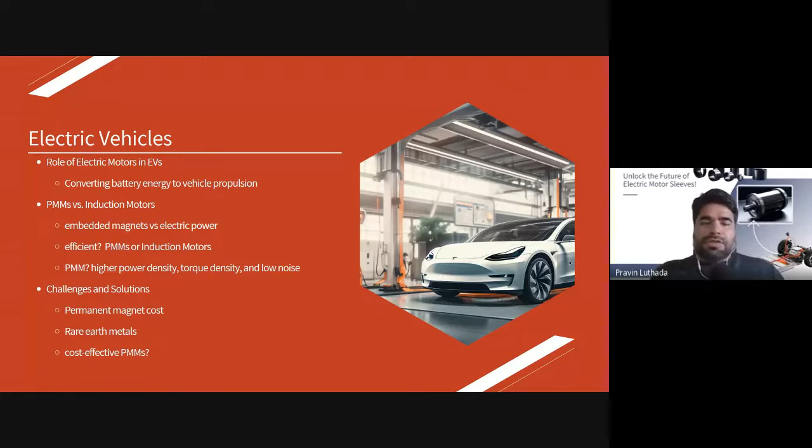expensive relative to the induction motors. So there's the economic plus and minus to be taken into account, and you start to see why composite sleeves start to make sense. So the electric motor sleeves, the main purpose why they were brought into the picture is to hold the magnets in place while the motor is in operation.

These motors are running at much higher RPMs, and these magnets, though lesser in weight, the momentum created by the high speed of rotation is so significant that it can easily break through metal sleeves at higher RPM. Thus, you would want to have sleeves that are able to hold the magnet in position at the highest rated rotation speed. So efficient operation means to have them not shifting.

One of the key concerns to start these was that once you start to make them thinner, the safety concerns start to rise up. The rest of the sleeve considerations really come from that: if the magnet is not kept in place,

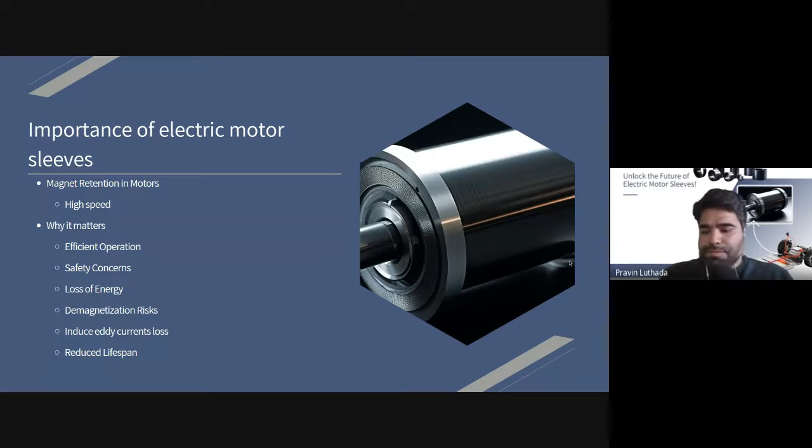So going into the materials, to begin with, when the motors were initially conceived, I believe it was metals where they started, and the operations were not at such higher RPM. So the main sleeves, still predominantly used in many of the industries, are stainless steel. For slightly premium applications, Inconels and titanium sleeves, despite their difficulty of manufacturing, they are metal. Most mechanical engineers understand metal, so they tend to go for difficult to manufacture yet slightly less dense

metal with higher strength. The key advantage, I believe, based on literature, to choose the metal is to match the coefficient of thermal expansion. So if there is going to be heat generated during the high speed rotation, the magnet and the sleeve would expand at the same expansion ratio, thus not disintegrating and holding it together well.

However, what ends up happening because of the higher density of the metal, at higher rotation the self-induced stress of just the sleeve alone is so high that it starts to expand, thus moving the magnet away from the right placement in the magnetic field, creating losses and more heat, and cycling it to either very inefficient motor operation or failure possibilities. And I think one of the other factors is the conductivity. So in case there is some electric current that ends up touching, it could cause the sudden failure of the system, of the motor.

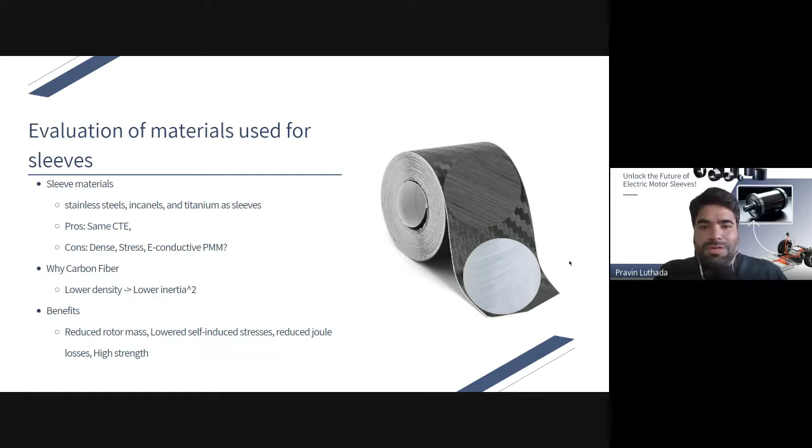Yeah, I believe that kind of covers why the whole industry would like to move to the carbon fiber side of sleeves. And as people knowing the composites industry, we know the cost and the manufacturing difficulty associated is the one that is preventing the move from happening. So by this point, we understood why we need more motors, why we need them to have good sleeves, and what the best material for the sleeve is.

Now, as we move towards designing the sleeves, we would want to consider what stresses and operational parameters while selecting the material thicknesses given the application scenario. So, based on the literature, what I have found, first and foremost is the hoop stress at higher RPM that creeps in and pushes out any contender that does not have very high strength along the radial or the hoop direction.

The magnetic assembly, you would want to have it assembled in a way that it is press fitted or in a way it's not allowing it to easily lift off. It's better to say a kind of chambered design that does not allow it. It's one of the most common approaches, and as you start to assemble the motors, you would want to have pre-stress applied.

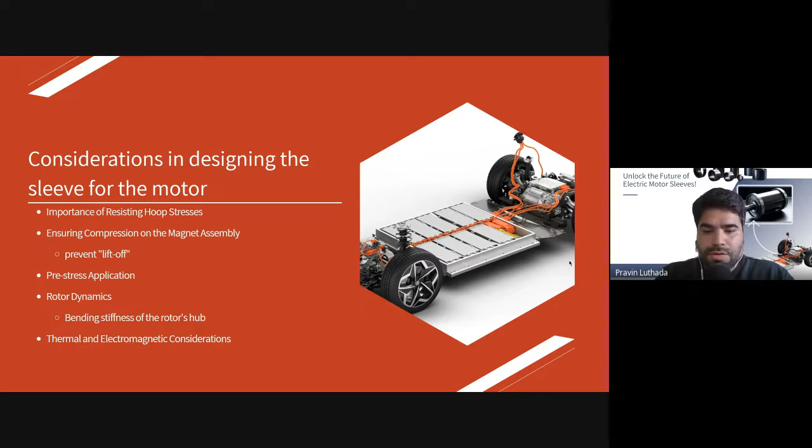Going to the next stage, and going beyond the material strength and modulus properties, corrosion resistance and the ability to be in multiple environments is one of the key factors for longer operation. So over the years, you don't need to look under the motor, because even if there is some moisture creeped in, there is no way there's going to be any rust. Composites are very good for vibrations as well, and as you're running at such higher rotation speeds, you're trying to make sure that you're staying away from the natural frequencies.

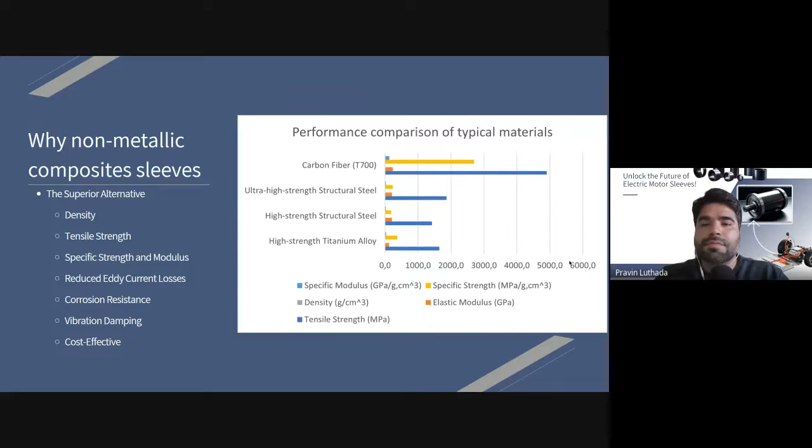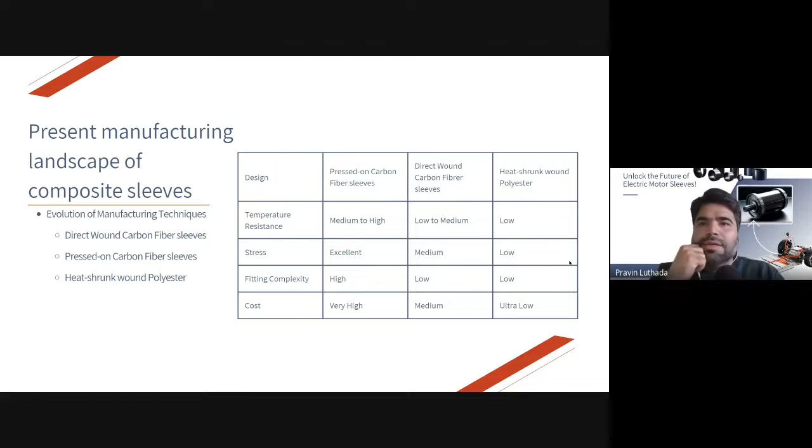The present scope, if you would want to manufacture composite sleeves: these are, from some blogs, some literature, what manufacturing methods I could pull together. There are direct wound carbon fiber sleeves, and here we are talking either filament winding, or it could be AFP wound as well, thermoset, thermoplastic, anything that is directly wound onto the rotor.

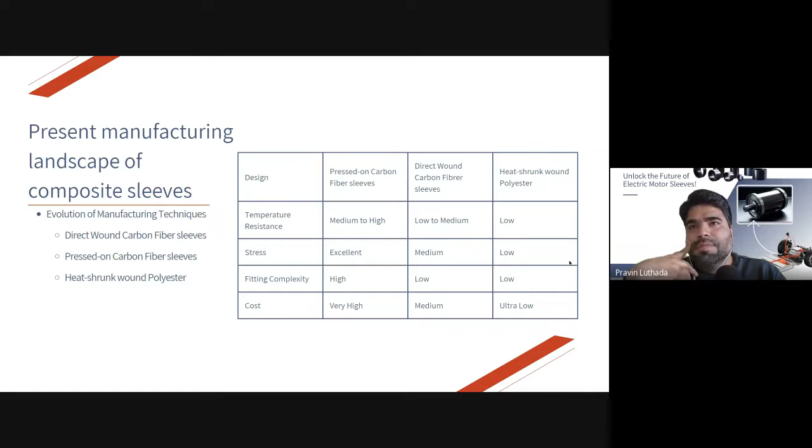The second one is pressed on sleeves, which are, I would say, if you have already manufactured a sleeve that is a constrained fit, and then you use some sort of equipment to put the sleeve on top. And this is considered the best in terms of being able to apply the highest amount of pre-stress onto the magnets. And as we discussed previously, you would want to have a very high amount of pre-stress, and this is assuming the magnet and the assembly is able to hold itself together and not crush on its own. But this is the method that allows for a very good amount of pre-stress.

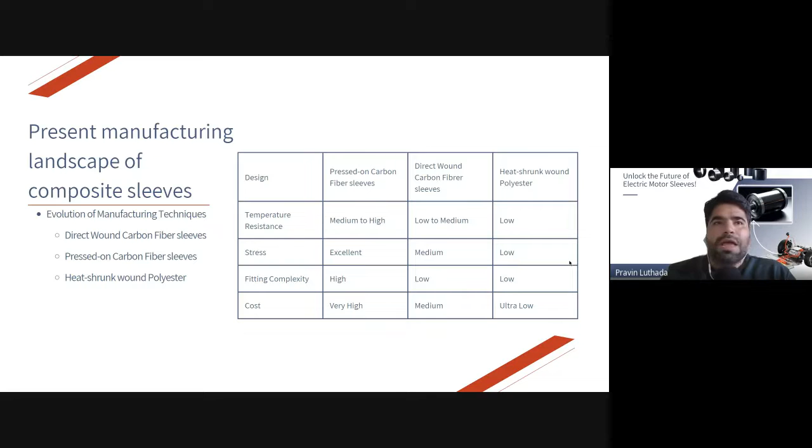And then heat shrunk wound polyester. I would think this method is mentioned more casually in literature, because it's not purely composites, but it's one of the low cost methods that was very primitively used previously. As you can see, it doesn't at all add to the value. So by this time, we have understood why sleeve, with what material, and what are the present manufacturing approaches to this.

And now I think, serving the title of the webinar, the direct sleeve winding with the AFP approach. So here, the title speaks a lot. First step is high tension, and then I would focus on thermoplastic composites. So let's focus on how we define this process, and that kind of speaks to all of the key obstacles that we saw earlier. So the process is just placing thermoplastic tapes onto a magnet, motor or generator with significant tension. And when we say significant, you would want it to be as high as the rotor assembly can take.

And if you focus on the heat part, what I'm showcasing here in these three images is the flash lamp heat technology. You can have laser, you can have hydrogen, you can just have normal IR, and all these are basically just different types of heat inputs.

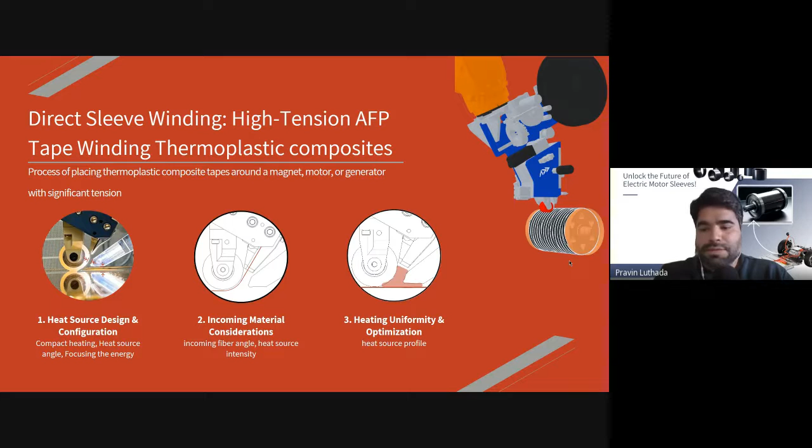The second part of the title suggests tension. And as we discussed, the pre-stress on the magnetic assembly that can be applied is very, very critical. And the tension in the AFP or similar system can be increased to a much higher degree by certain approaches. As shown in the image here, you can go through all the guide rollers, and the friction on those really allows you to add up tension. The more the rollers, the more tension there is.

But with AFPs, usually the area that you have is quite small. So usually the tensioning is motorized. You have a motor holding the material spool that is acting as a brake. And in addition to that, along the way you definitely have hoops and pinch points where you're applying additional braking. The tension is additive in nature and adds up to a final tension of certain newtons.

There are pneumatic tensioners as well, but they're not that prevalently used. They are, I would say, just kind of a friction adder in a way. So I would rather focus on the other section, which is the dancer and the clamping points. Once you are doing continuous tape winding with high tension, the dancer becomes in a way obsolete. But as you reach either edge of the cylinder of the motor, the turning requires the rotation of the winding axis to slow down and then increase in speed. The dancer plays a key role in maintaining tension as there is a change in velocity, and it's a very critical component to consider.

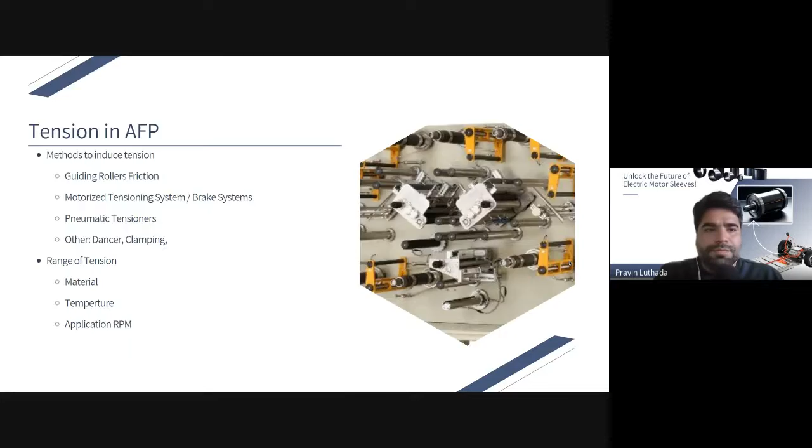Yeah. So now we covered, I believe, the AFP process where we focused on the high tension thermoplastic winding, how it can be done, and what the critical factors are there. The next bit is why it is good to use this direct winding approach and what it brings to the table.

So you're basically doing a very high tension winding, so you're getting the obvious benefit of pre-tensioning as you manufacture. Whereas if you're doing the two-step approach, which was mentioned as a sleeve and press fit approach, you make a sleeve and then you have a hydraulic system that applies it. So it's a two-step process. Whereas with this AFP direct winding, you have only a one-step process, and that's it.

I think that's also one of the reasons to have thermoplastics, because you don't want to make it a two-step process. You want it to be in situ consolidated, cured, coming out, right? Pre-tensioned onto the rotor, nowhere else. So that's the ideal goal.

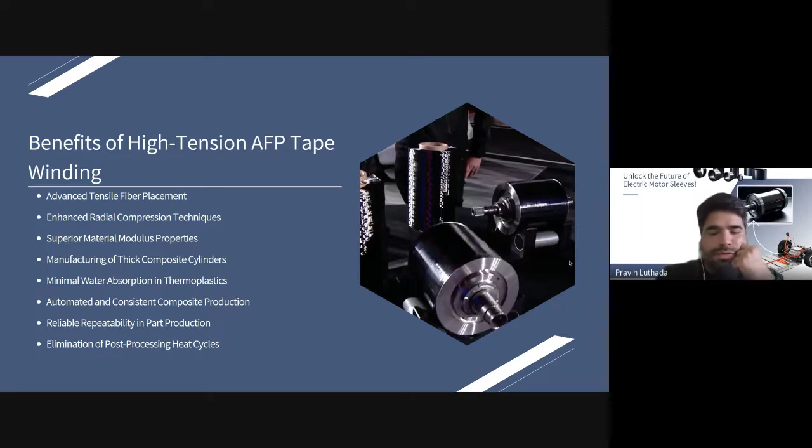And there is no post heating required because you use thermoplastics; there are a lot of benefits of using them. I think I covered this in the previous slide, but I wanted to focus on why thermoplastic specifically, because it could have been thermoset, and most of the properties could be true, and thermoset could definitely be one option where a two-step process of post curing is okay.

With thermosets, what you cannot do is apply very high tension because the tape is uncured, and the fiber is the only thing taking the load. So there are very high chances of fiber breakage. So thermoplastic tapes can take much higher tension compared to thermosets. Thermoplastics are more durable for extreme environments, which makes them the ideal candidate for oil and gas industries and outdoor applications.

This is based off literature. They are without the electrical loss of metal, but they have better modulus and low residual stresses. As I mentioned, no post processing, because in situ consolidation is definitely possible. And the last one, which I think is now driving thermoplastic adoption highly, is their reprocessability. So once you reach the end of the life of the motor, those sleeves can be repurposed to make something else, whereas those need to be burned.

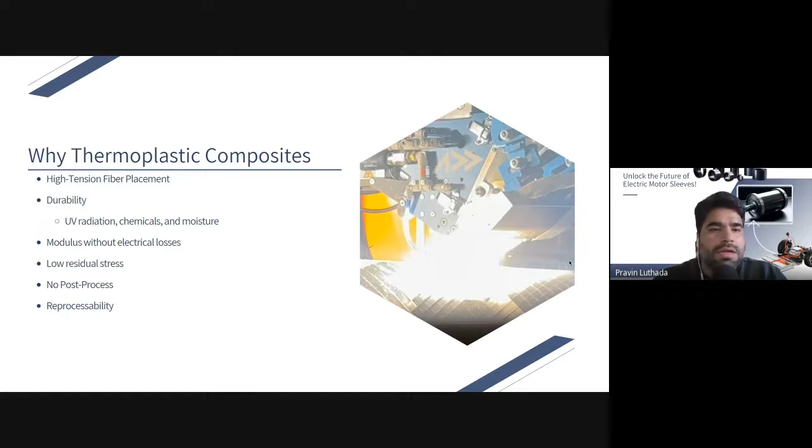So now if you would want to set up this setup yourself, what would be the requirements, what would you need to have, and where should you start? So what you need if you want to set up the production facility is, I feel, just a robot. If you have a chuck in front of it, great, but you can always buy an extra motor, and that is as good.

So you have a robot with this rotating axis in front of it, and then you can just have the AFP head that can be rented, from AFPT or from others, and then the heater that you would like to use could be of your choice. So you can use any existing heaters, or you can choose to have some industry-specific heaters that you would like to focus on, and I think that is where we can help.

Then I think if you know what industry you want to aim for, where these sleeves will be useful, selecting the right material sets the price point, basically. And design and simulation is where we can help with estimating the time and material used for the given material. And also the cost per cycle of making one sleeve could be very easily calculated.

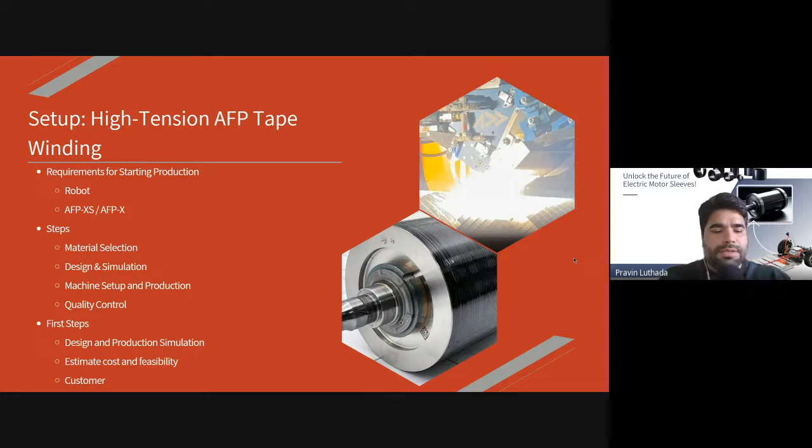But yeah, one of the last bits I would leave you with, and this is definitely the last slide, is the real-life use case: who is using them at the moment. And this is the most famous use case out there, the Model S Plaid from Tesla.

That's supposed to be one of the highest performing cars in terms of speed, range, and acceleration, and to operate at such efficiency, Tesla, which is a very cost-conscious company, has chosen carbon fiber sleeves. So it is an example of why electric motor sleeves will be carbon fiber sleeves with thermoplastic, which have very high tension. It could be with AFP or winding, but in the end, it seems like the application case is there. It makes budget sense at scale.

There are others, based on a few other webinars' information that I could find. There are also jet engines in planes with electric sleeves; they are thinking of using it. Subsea motors, but I couldn't find any specific examples. Except, with the same circular geometry, there are pipes, the hybrid pipes, that are using it, but not in very high volume.

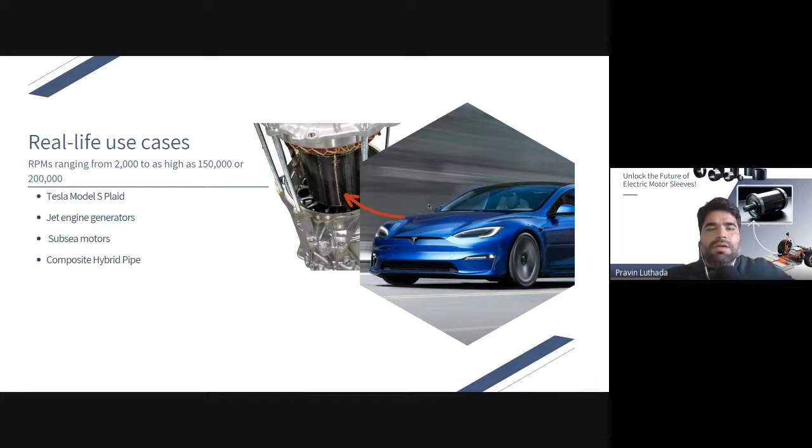Yeah. So with this, I would say we move towards the Q&A of the presentation. Let me go to chat and see if there are questions. So let's see. High tension is mentioned during the direct sleeve winding. Can you provide a precise order of magnitude of this tension? Okay. So please let the questions come in.

First of all, Jean, thank you for the question. What I have found, given different applications, you're looking at from 100 Newton up to 2000 Newton. There is a very high range, but it's the application that decides the range. And with the AFP systems, with motorized braking, there is a very high possibility to change to what range you want to have. So it's just a selection of the braking motor, and that would give you a very good range of tension.

I would say usually, to be on the safer side, at least a 1000 to 1500 Newton system should be taken, and I think it should be sufficient for most applications out there and shouldn't create any other issue. I'm trying to see if there are more questions. Yeah.

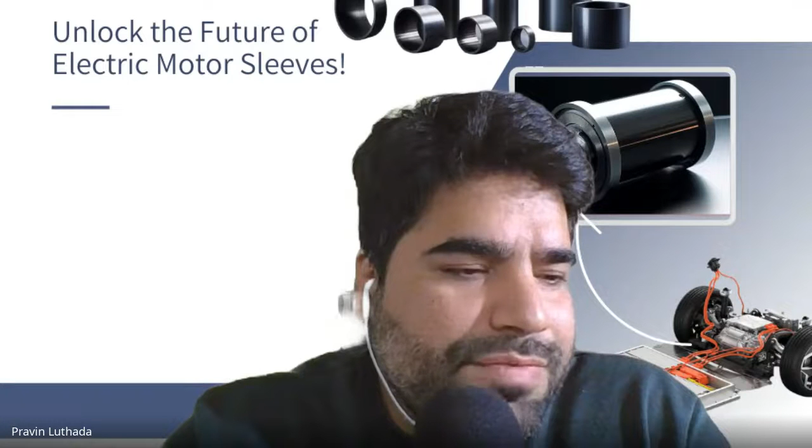1,000 Newton tension is not conclusive. What megapascal are you talking about? Yeah, to be honest, I have only looked at it from the point of view of how much tension AFP is applying. I have not looked at it from the megapascal point of view, although the data is there. I'm sorry, I don't recall. But I agree with you. I think a better metric is the megapascal.

Yeah, with dry fiber, we can pretension them up to 25% of their given tensile strength. Yeah, for thermoplastic, you can almost go up to 90% without breaking them. If there is no misalignment, you're able to tension them at a very high level, because they are basically cured thermoplastic strips. So from me, what I've noticed is that the tension can be very high. It's one of the reasons for thermoplastics to be used. But this is very good information, sir. Thank you for sharing.

If you're just using pure fiber, I would say even for prepregs, it should be about the same range, about 25%, because there also the resin is not cured and only the fibers are taking the load, and it's not equally distributed. So, but yeah, I think these are our questions today. As suggested, I would try to.

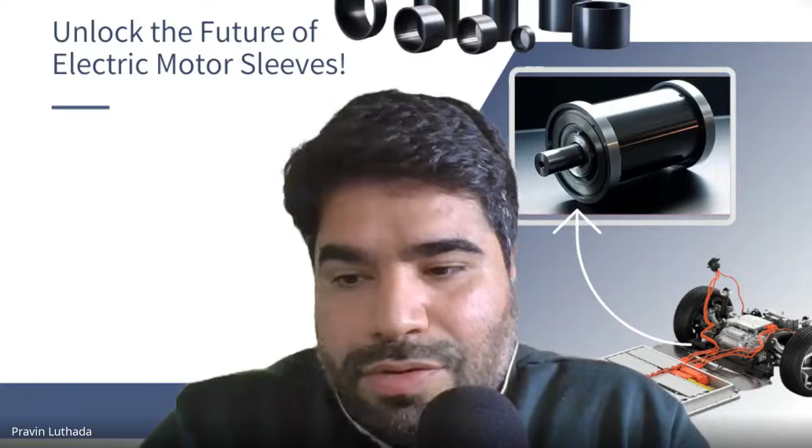Yeah, I think Eric is saying here, if the fiber is melted, I'm assuming the matrix is melted, but that's not completely true. You're only melting the surface side of it, so the tape is not completely melted. It holds its shape. So yeah, it's very high tension you can apply, because it's also for a very short duration. I think that's what enables it to be used with very high tension. But I might be wrong in saying about 90%. That's just based on literature, what I found. I'll try to put this in perspective.